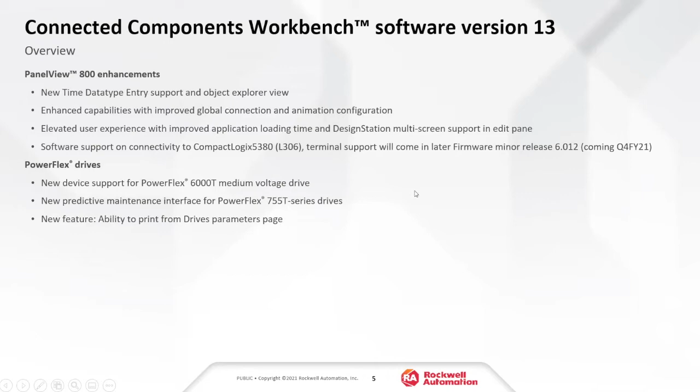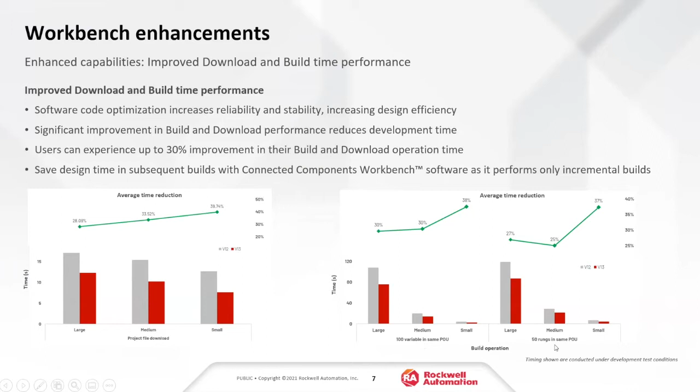What you're looking at here in red is the build time and download time in V13 as compared to version 12. On a large, medium, or small application, roughly about 30 to 40% improvement. Same thing here on the build when you're looking at variables and on the 50 rungs.

On run mode change, there's been some enhancements made on the workflow. This is available on developer edition, the paid version of CCW that allows for run mode change. Some of you may know this in the Logix world as online edits. In the original mode, you would select run mode change, go over to your ladder, make your changes, and then you would have to test the edits to see if the running code is okay, and then go ahead and accept it, or decline it.

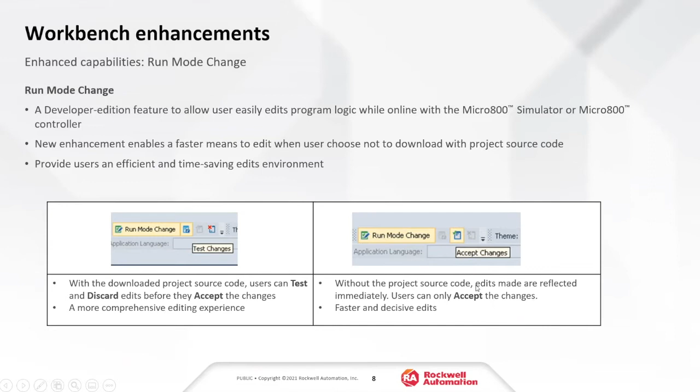On this newer workflow, you select run mode change, make your changes, and then you just accept the changes. There's no testing, there's no declining. It's make the change and then let it go. So that's a little bit of a faster workflow. I'll show you how to activate that feature.

On the tag browser, a lot of improvements have been made - much cleaner, with the ability to browse down into bit level addressing, the ability to change the scope of tags that you're looking at, to filter out and do search. So it's a lot easier to do.

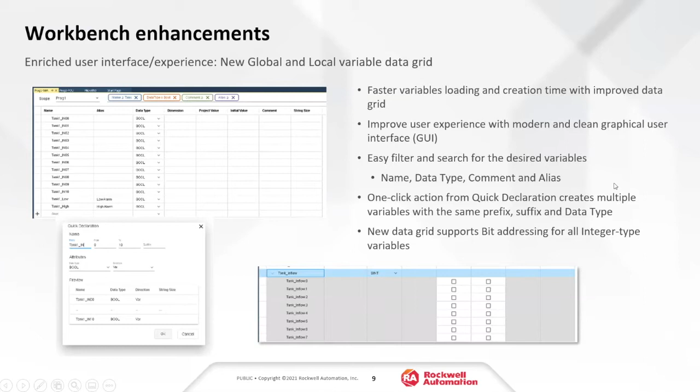The biggest new feature is the one-click quick declaration. This allows you to create multiple variables where you can add a prefix, a suffix, and then specify a data type. So really a lot of improvements made here.

On the Studio 5000 Logix theme, what happens now is the icons are changed over to what looks like Studio 5000. Anything else in the application, if there's a PowerFlex drive or a PanelView 800 graphic terminal, that gets dropped - it's still saved in the file, but for somebody more accustomed to using Studio 5000, since it's very controller centric, this is much more familiar to them. You can create your tasks, your interrupts, your routines, in a very similar fashion as Studio 5000.

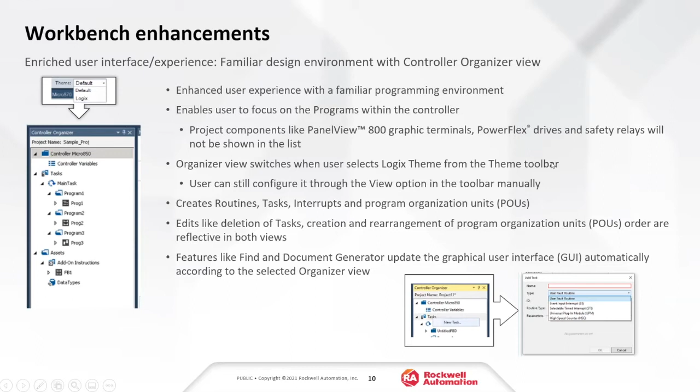The ability to see this is going to be more of a future feature as time goes on. Rather than finding out before or after it's too late that a product is end of life, Rockwell has built into CCW the ability to see the status of a controller.

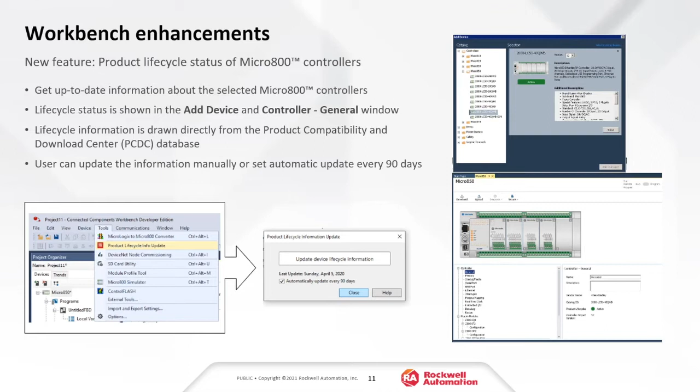This updates every 90 days, or you can access it from the tools menu and manually update that product life cycle. There are no plans to discontinue any controllers here in the near future, but several years down the road we may run into this, so it gives you more visibility into the status of that product. Then the last part is the find feature and the document generator.

Find can give you hyperlinks directly to your program once you do a search. The document generator lets you export the program into a Word document so that you can easily document all your tags, your programming, and put it into a nice Word document that can be printed out.

So I'm going to flip over to CCW and show what this looks like. Here we have the product lifecycle shown if it's active.

When I was talking about the first part, about run mode change and these multiple buttons up here to activate the faster online edits, there's an option in the main controller called download source code, and you need to select no. When you hover over this informational bar, it'll tell you that if you enable download source code, which is the default, the run mode change will give you the option to test those changes and then accept them. Setting this to no will just allow you to accept the changes, so much faster edit time.

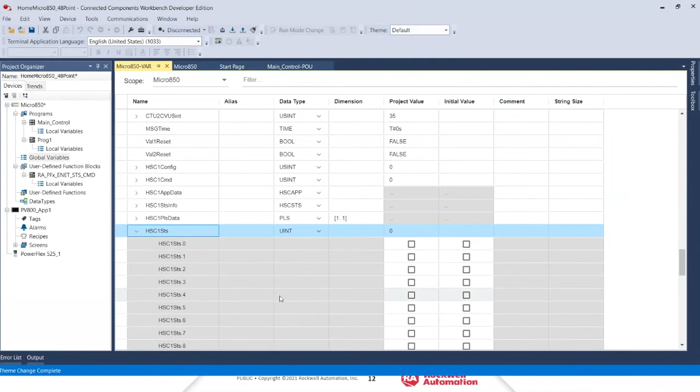Another new feature I talked about is quick declaration. So if I'm in the tag browser and I want to create, let's say, 10 timers really quick, it's going to add a prefix. It's got some dummy proofing here. So it's 0 to 9. Let's say I accidentally make this 20 - well, then it's going to increase this number because you can't go before it, and we'll make that 29. We can add a prefix or a suffix here to say timer.

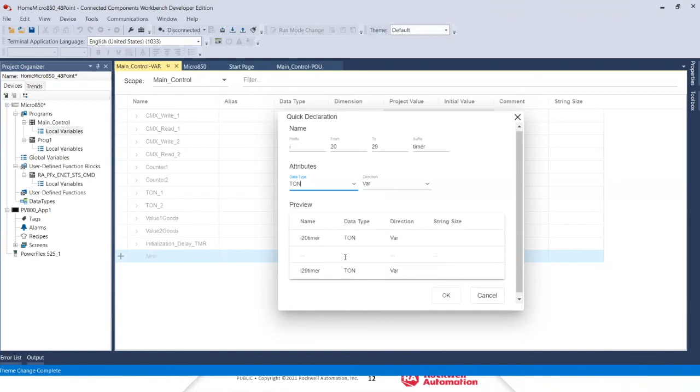We can set our data type. We'll do a timer on delay. And here it gives you a preview of what this looks like. You hit OK, and now we've created our 10 timers here pretty quickly.

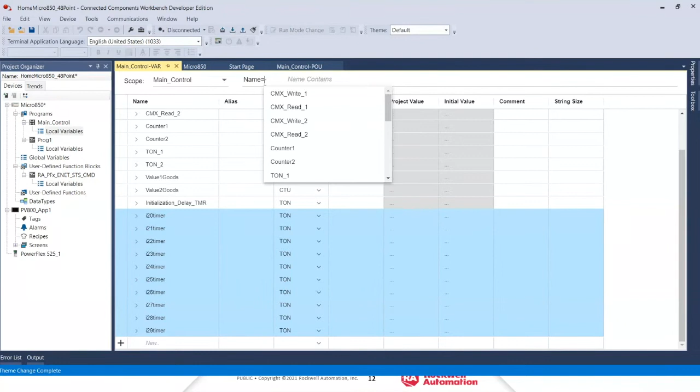Then on the filtering, let's say we want to find our timer value and we want to look for a data type of TON. Here we can add up to 4 filters. So here there's comment, and after that is alias. You can go ahead and quickly filter out your tags.

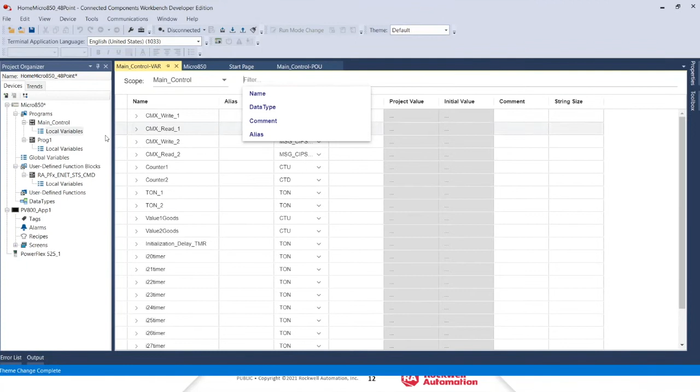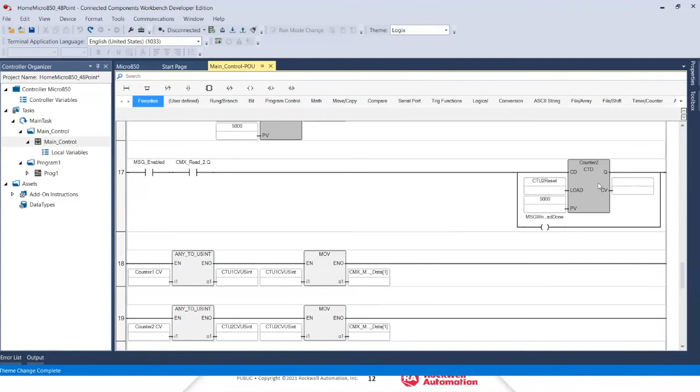On the Logix theme, you'll notice on this left-hand side there's a panel view, there's a PowerFlex, and you'll see the icons here look like Micro 800. When I flip this over to Logix, it changes, and this will look more like a Studio 5000 file. The instructions themselves are pretty much the same, but it makes it more familiar up here at the top, where you have your different symbols.

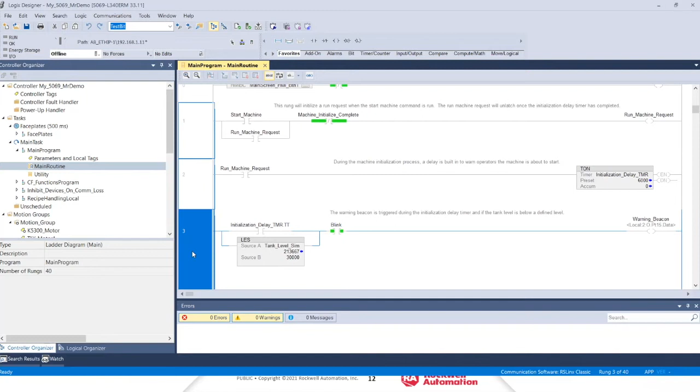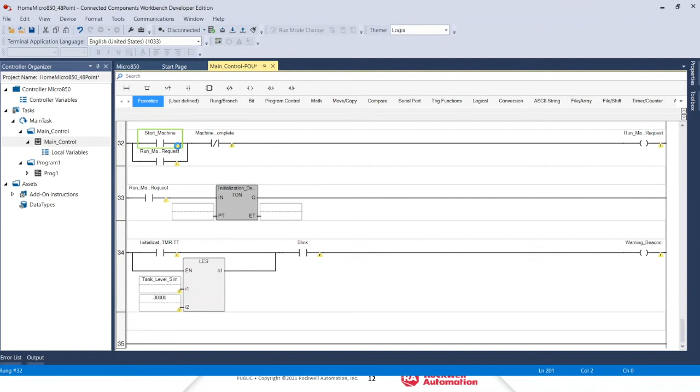The other thing I want to show is, if you aren't aware of this, you can go into Studio 5000, and here I'm going to highlight these 3 rungs. I'm going to copy, and I'm going to head over to my CCW. I'm going to add a rung here just to make it easier to right click and paste. I can now paste, and it'll create the tags that were out of Studio 5000, and then we can go ahead and double click here to create each of our tags.

So it'll go through, and then you can just hit OK. It'll create those tags, convert the timer to the Micro 800 version of timer, and bring in the less than equal to.

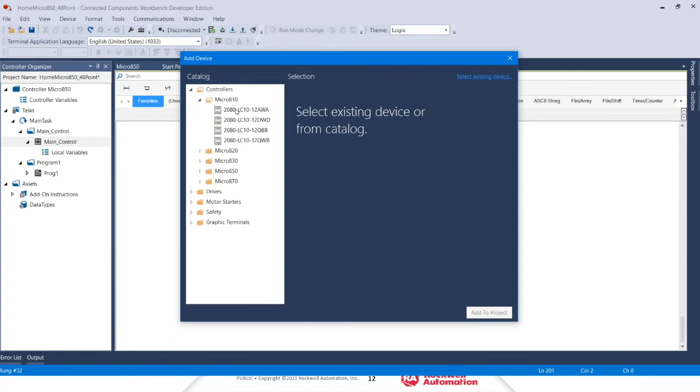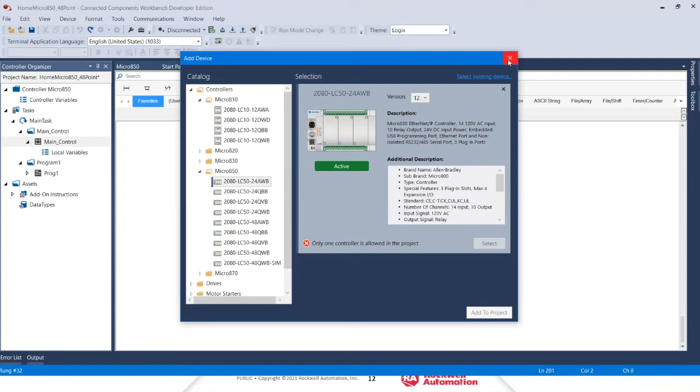When you're creating a new controller file and we hit new, when I select a controller it's going to tell you if it's an active product - as I said, right now everything is active. You'll notice that your firmware version remains at version 12, despite this being 13, so there's really no new firmware update. This is backwards compatible with all the other Micro 800 controllers, so you don't have to worry about firmware differences - you could just go ahead and upgrade your program, and away you go.

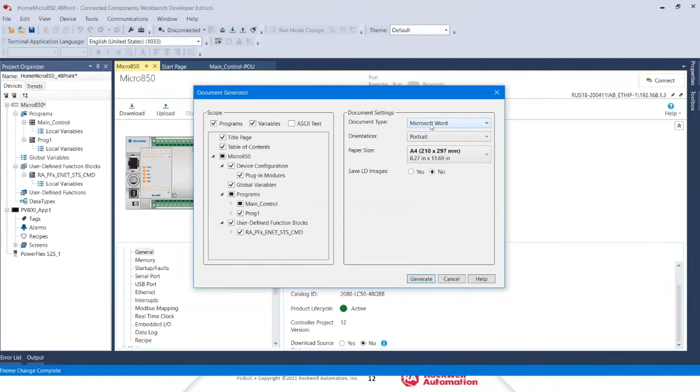Okay, we'll look at the document generator, available under File. You'll have the controller selected, then you can go ahead and select what you'd like to export, and what document type to generate, which can then be viewed later in a Word document.

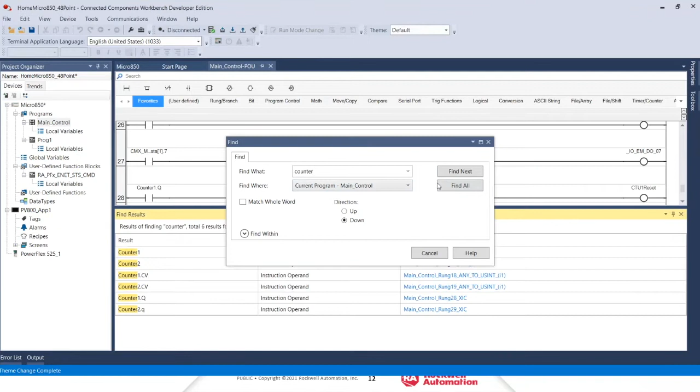The Find feature—if I'm in Programs, you can do a Control F to bring up Find, under Edit, Find. Let's say I want to look up my counters and do a Find All. This brings up all of my different counters, giving me a hyperlink to look for it that'll take me right to it. So there's been a lot of improvements made on Find.

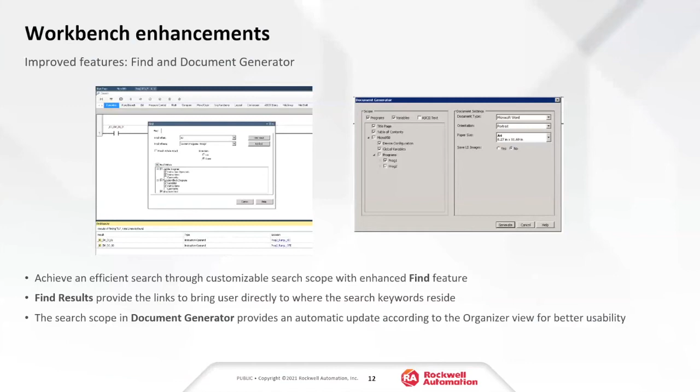That pretty much covers everything that's new on the Micro 800 side. What I'm going to do now is go back to what's new now with PanelView 800.

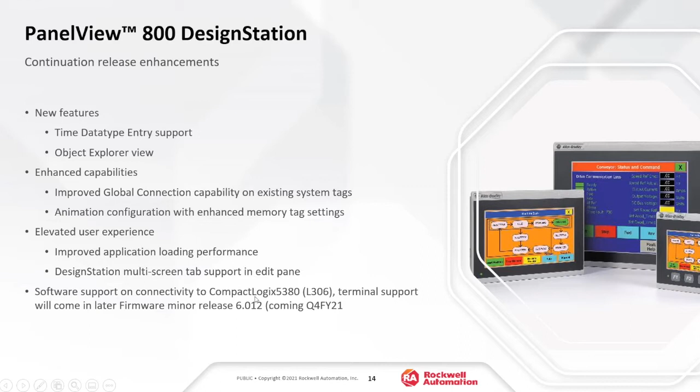The biggest enhancement has been the time data type entry. There's also the Object Explorer view, which I'll show you in a little bit. They've added more global tag connection to the existing system tags, animations now with different memory tag settings, the ability to edit multiple screens, and software support for the L3065069.

There's a question in the chat: did timers and counters get bit level addressing, like EN, TT? Well, TT still does not exist in the Micro 800.

A TT would be a timer timing bit, so that hasn't been added. The timer still gives you the elapsed time and the preset time. What I can do at the end of this is show Scott a drill down into that, just to stay within our 30-minute time limit. I'll go ahead and address that at the end, okay?

On the time data type entry, we're using a string entry, and we can manually type out the format for timer, T pound, and what time value we'd like to add. Or if you're more accustomed to milliseconds, you can just type in 10,000 and it'll automatically convert it to 10 seconds.

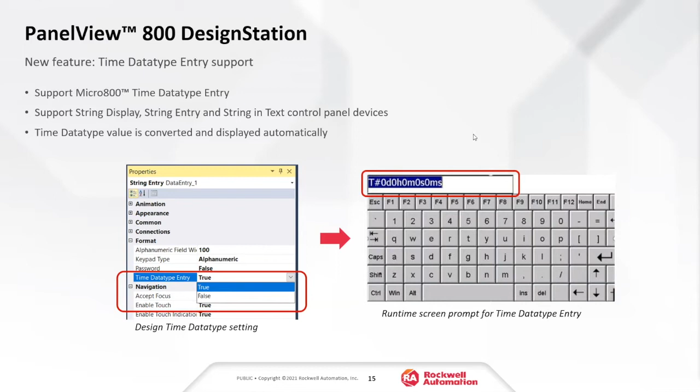The Object Explorer view—bringing out Object Explorer will give you all of the objects on the screen. You can choose to lock down an object for edit, so it'll hold its position and you can't make any changes to it. You can do a vibrate, so if you don't know what object it is that you're looking at when you select it in the Object Explorer view, clicking vibrate will cause the image to dance a little, just to call it out to you.

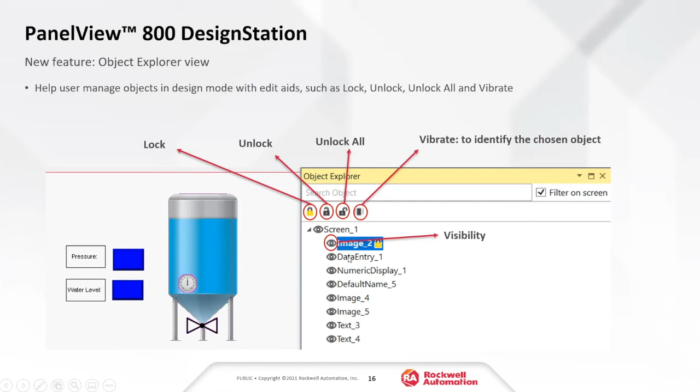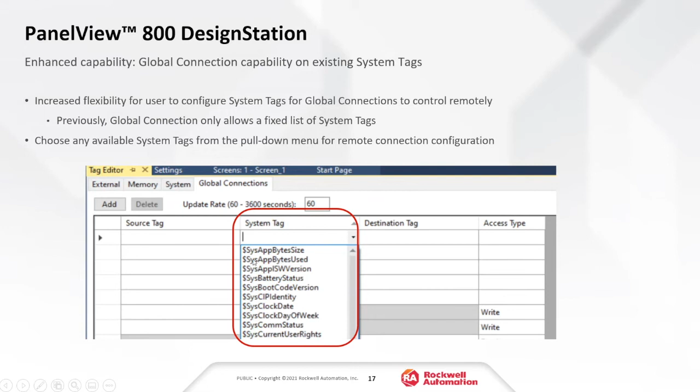On the global tags, they've added the ability to access the global tags, so you can choose a lot of the system tags now for global connections. There's also enhanced memory tag support.

Now there's an advanced setting where you can create a memory tag that will have an auto change feature. You can set the rate that you want that auto change to increment, and set the trigger if you want it to always trigger, or if you wanted to look at a trigger tag. This can be useful for animations.

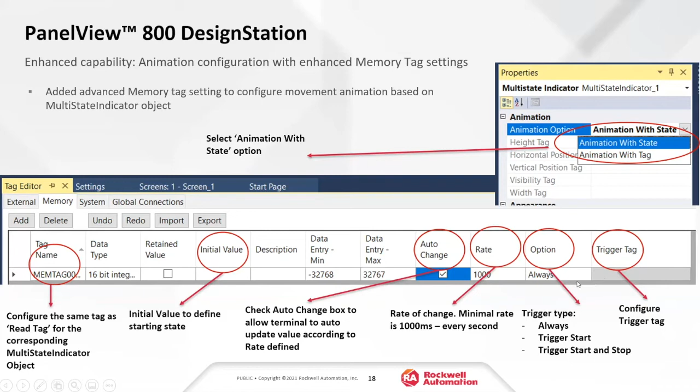Now what we'll do is flip back over to CCW, and here when I go to my Panel View 800 app, on this string entry, let me talk about properties here. When I select this button, this is a string entry. I have set the data type for time data type entry to true, so this needs to be turned on for that timer value to be converted.

I'm also writing to my average timer tag, and I'm giving it the indicator so I can display what that timer's been set to. This is a string display, and I also have the average timer elapsed time—so I'm looking at the elapsed time, and I've set this to the time data type.

Now I'm going to remote connect to my Panel View, and you'll have to excuse the discoloration. Right now I have my timer set to 1 second. You'll see it counting up, which kind of clues you in on what this data type looks like and how you can edit the timer. So I can select, maybe I want to make it 5 seconds—I can type in 5,000, and it'll update to 5,000.

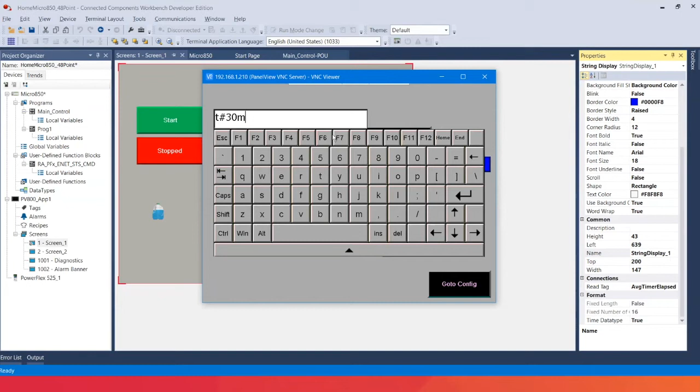This will count up. But if I know I want a longer timer value, maybe 30 minutes, I could do T pound 30M, for 30 minutes, and it will set the millisecond value to what is 30 minutes, and then this will continue counting up. There's no data manipulation needed within your Micro 800 file anymore.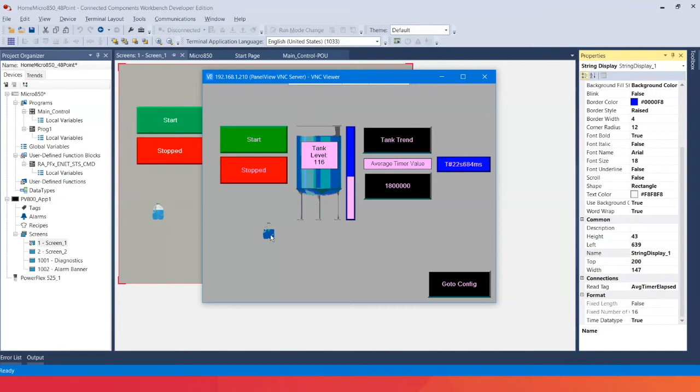This is just done all within the firmware of the panel view. Here you'll see this little milk jug running across the screen, and every second it advances 1 pixel. We can look at how that's been accomplished when we go back into our Object Explorer.

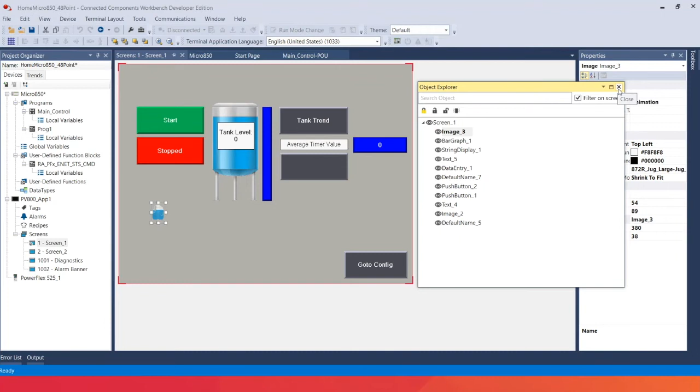Under View, you can pull out the Object Explorer. Here I have all of these on the screen, so I can select, and you'll see it starts to highlight. If I can't see it, I can select vibrate and it'll dance around for a second. So I can select image 3 and lock that down so that I can't make any changes to it. I can click on it all day long and it doesn't do anything. I can go ahead and unlock all if I need to edit it.

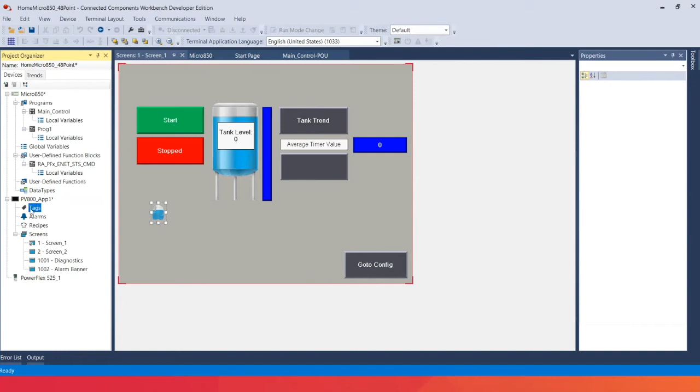Here you'll see my horizontal position has been set to this tag called animation. When I go into my tags, here I have memory, and I've created this tag called animation. From here, I can select advance and open up.

I can create a min and max, which I've done 50 pixels and 300 pixels. I've enabled auto change, and then the rate I can set has different time increments that are pre-programmed. Then you can set when you want this to trigger. I just have this always running.

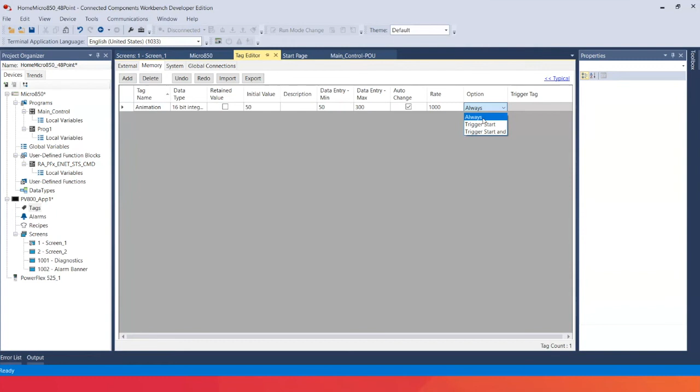Looking at global connections, here we have additional source tags that we can use. A lot of these system tags have been added now that you can use within global connections. So you can get access to the IP address, or if you need access to the contrast, OS, there's a lot more information that you can bring into the Panel View 800. So that pretty much covers what's new within the Micro 800 and Panel View 800.

And what I'll do is hand it over to Lee, and he'll go over what's new on the PowerFlex Drive updates.

All right, thanks, Rob. All right, so like Rob said, I'm Lee Waldrop. I'll be doing the PowerFlex portion of this.

So there's been several updates for the drive profiles since the release of CCW version 12. If you haven't been downloading those profiles, that's okay. As soon as you download CCW version 13, you'll have the latest drive profiles available, giving you access to Rockwell's current features for all of their drives supported by CCW. Next slide.

All right, so the 6000T, CCW version 13 now supports the medium voltage 6000T, including a startup wizard. Rockwell has used the same architecture and firmware found in the PowerFlex 755T and all of its different variations within the 6000T. This gives a similar experience with both drives, and it streamlines your programming and any training you might need to do. Basically, if you've done any work or training on programming the 755T in the CCW environment, you'll see a very similar experience with the 6000T. Next.

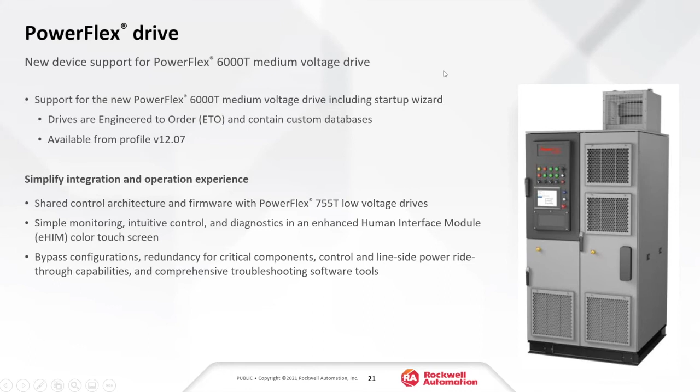All right, the predictive maintenance with TotalFORCE technology. The predictive maintenance feature in CCW for the T-Series drives like the 755T and the 6000T is designed to help mitigate downtime. The screenshots you'll see there, I can't go live with that. I can't fit a 755T or a 6000T in my house, and you have to be connected to one to get that screen on CCW. But the drive uses formulas that have been tested by Rockwell to calculate remaining life of the components within the drive. Components like the LCL filters, caps, fans are some of the components.

You can even set environmental settings, so that'll be factored into the calculations for remaining life of the components. On top of this, you can set alarms to let you know when a component is getting close to its suggested replacement time. The graphical interface through CCW will also display the catalog number you'll need to order to replace those components. So all this is done to turn unplanned downtime, which no one likes, into planned downtime and to increase your machine's efficiency. Next.

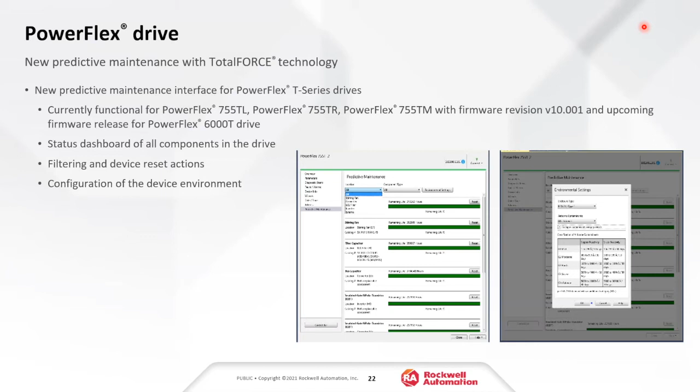All right, and back by popular demand, the export parameters function that fell off for a few versions of CCW is back with this newly reinstated feature. You can filter the parameters for all non-defaults and print them, save them to a PDF or in an Excel file. You can print the entire list of parameters if you want, or save them all to Excel. If you print them all for, say, a 755, there's just under 1,500 parameters - about 32 pages. So you might want to just stick with the non-defaults. But it's a great feature.

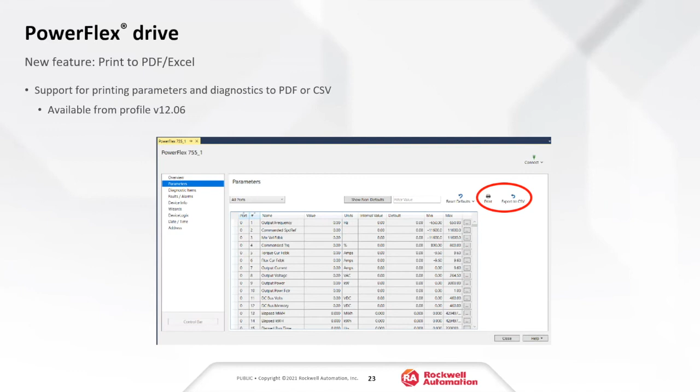It helps you back up your programs and might help you troubleshoot, give you a starting point, or in the chance that it fails to replace it, it'll increase your uptime by decreasing your downtime. So that's all I got, Rob.

Thanks, Lee. All right, I wanted to close this out, show you a couple of resources that are available. The first one from Rockwell Automation is what is called OnCourse, and this can be set up by your distributor. There are actually virtual applications hosted up in Milwaukee at Rockwell Automation, hosting all kinds of different applications.

And we can use this as a tool for training, or if you need help with just getting more experience on different applications. So here on OnCourse, there are 3 different applications available, and it gives you the ability to look at the programming, what was done to make this all work together. How do you talk to a drive? How do you talk to a servo? What does the PanelView 800 look like? So really it's a nice way to learn remotely on your own time, and give you some ideas on how to do some of these simpler applications.

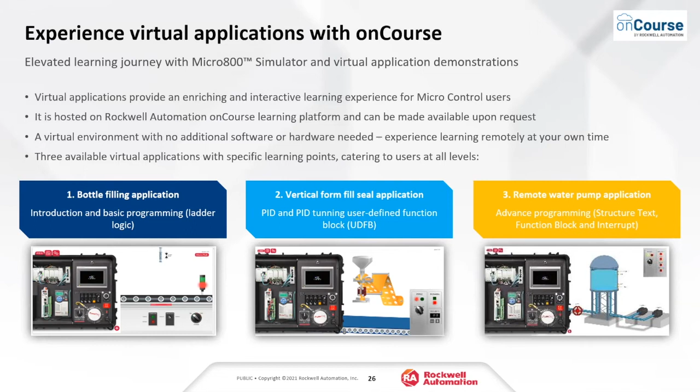And then aside from that, at any time, on rockwellautomation.com, you can access the literature library. There's a great YouTube channel now on CCW, all kinds of tutorials available if you'd like to do more drive integration, or do some basic motion profiles with our newer Kinetix 5100 servo system.

So there's really a lot of things that you can do with Micro 800. It's really designed to be a standalone system. You're not doing distributed I/O, and you just need simple, low-cost control. This is a great control system platform that really added a lot of new features to it to give it a lot more capabilities than, say, 5 or 6 years ago.

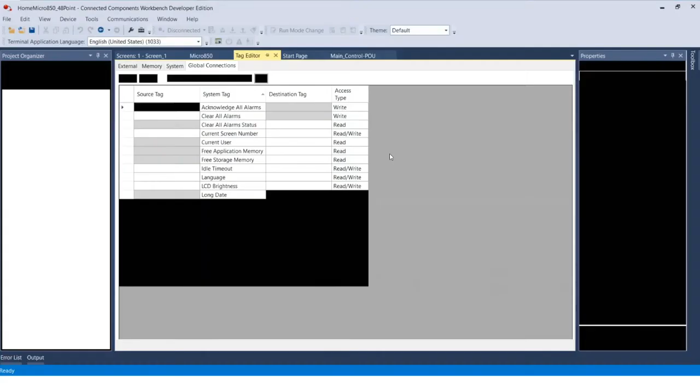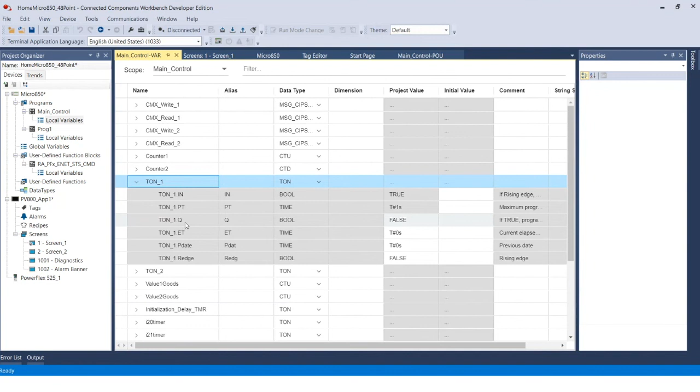So where am I using timers? I have some counters, but I'm looking at my time value and I expand this. You'll see you have a done bit, and then you also have this in bit. And so what I see people using, like to mimic the timer timing in your logic, it would look something like this. You'll have to excuse me because I'm kind of doing this on the fly. Because I'm within this scope and the timer is being used, I can do, I think I called it, yeah, TON1. And if I go to the end and put dot, I thought it was in, but I don't see in, so it might be the rising edge.

And then same thing, TON1 dot. And so what this is looking at is I'm on the timer, it's enabled, but it's not done. This pretty much mimics your timer timing bit. So a little different, but that's how you can make that same feature, and use this digital output. And so let's download.

Can you hear me, Rob? Yes. Okay, sorry, I had my laptop closed.

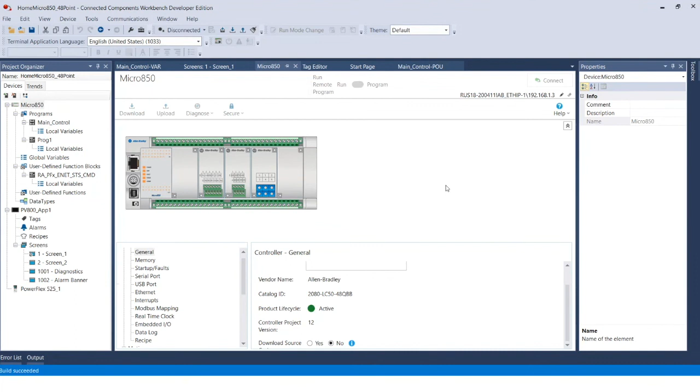What was the second Q that I saw in the pull down? Yeah, they have it in parentheses, and I'm not really sure why they have it twice.

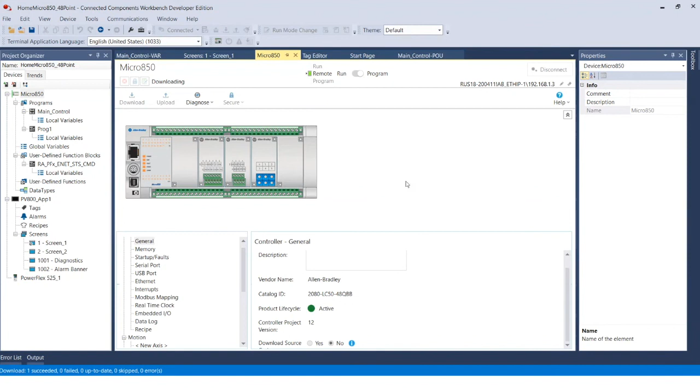Let's see here really quick. I wrote my program probably over a year ago and haven't thought of it since, unless I do a quick download once in a while. So I've got to refresh my memory on how I even did any of this stuff.

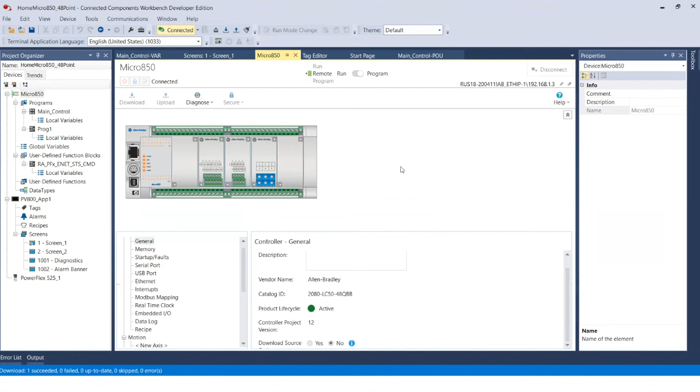But I remember I did have an issue with not all the bits that the MicroLogix had. Oh, I just did a bad thing. I did a destructive bit, so this might not work the way it should.

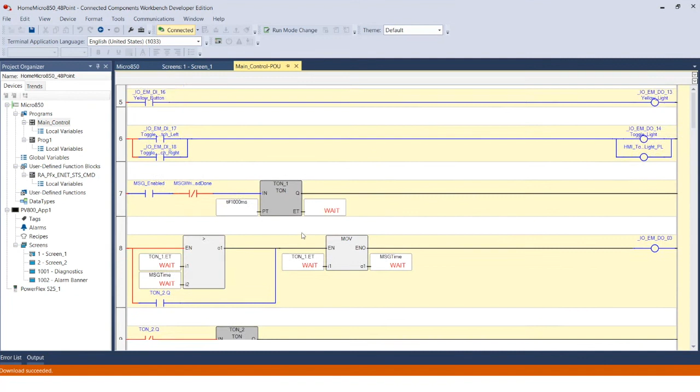Let's see what triggers my timer up here. So if message enabled, and the problem is I have a green light here tied to when my message... So this application is just messaging other CompactLogix, and so I need this.

So I'll show you here. We'll access run mode change. Use a different output.

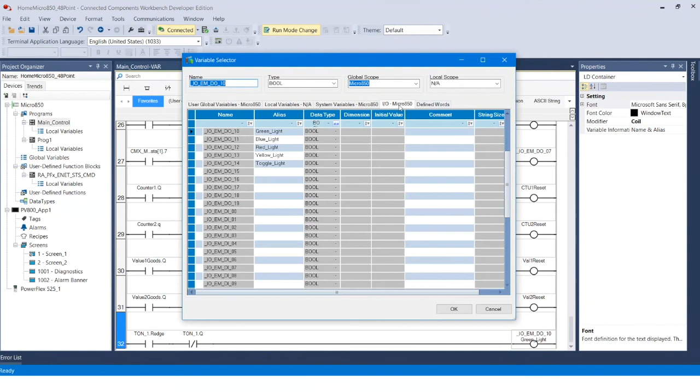And now, since I have that download source code on, no, I just hit accept. Then it'll go ahead and push those changes into the controller. So now you don't have to do a test and then accept.

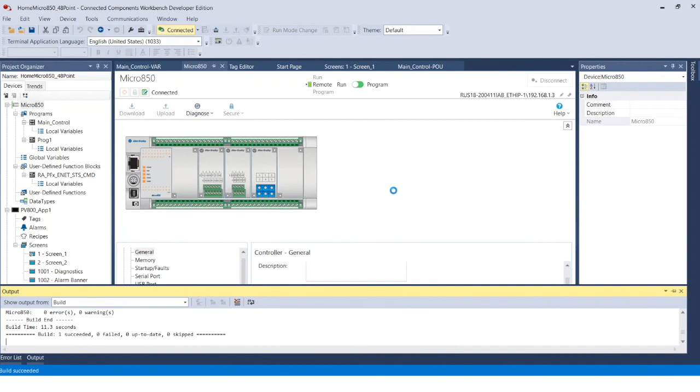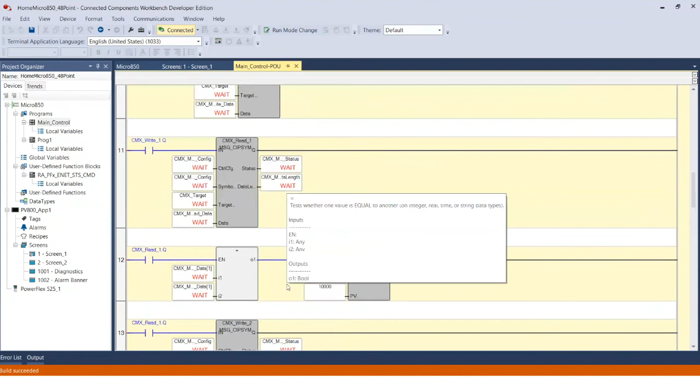All right, so if I go, I know it's not going to be super easy to see the timer going. Let's see, it's only set for 1 second. What I can do is push my start button here.

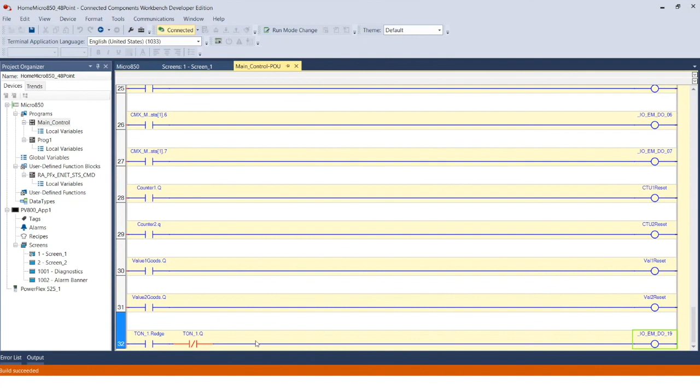Yeah, that didn't capture it quickly, but what happened was my output 19 kicked on for a second and then turned off. But that's how you can kind of get that.

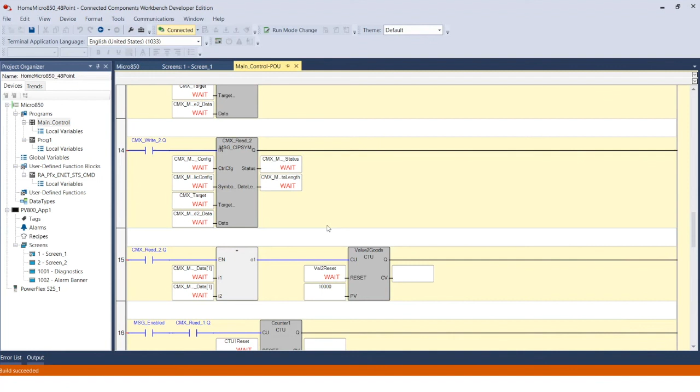So these, if you're within the same scope of this program, you can get your tags that way. And then if not, you'd have to create a global tag. So it's actually not even possible to do that.

It's not possible to access that because you can't, like, let's say if I were to create another ladder logic, I wouldn't be able. So just be aware of that. But that's how you can mimic that timer.

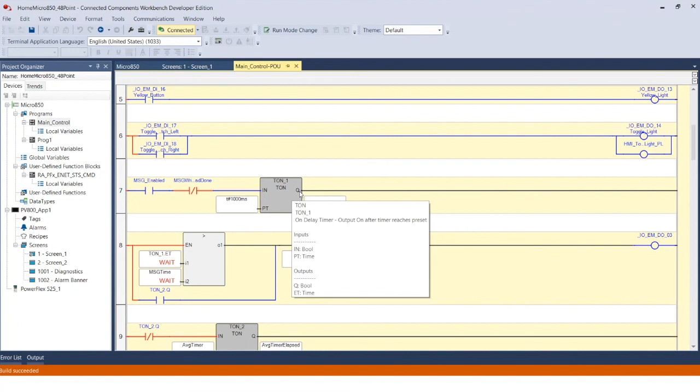Now you were asking about disconnect.

It's interesting, this is taking longer today. That's always the risk with live demos, right? Because earlier today, this wasn't doing this. Hey, you're welcome, Mark.

Any other questions, Scott? No, I think I'm good.

You can't address it if it's in, because the local/global thing threw me off, and the PanelView 800 doesn't address or pick up local tags, right? It's only global. Correct, that's still the case. Okay, that was another issue I remember running into.

So there is a way, if this doesn't cooperate with me, there is a way to actually set it up so that by default, global tags are what come up first. So when you go to create a tag, by default, it will put it in the global scope.

Well, that would be useful. Yeah, so it's under tools and options. I'm gonna go ahead and just see if this is not.

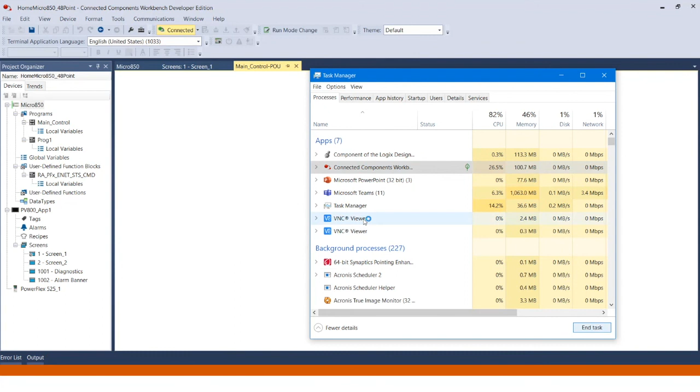Yeah, that threw me off because there were a lot of tags I had to copy and paste back over to global, because I kept forgetting that they were local, or I thought I could use them as local, and then I needed them in another rung or another ladder. Right.

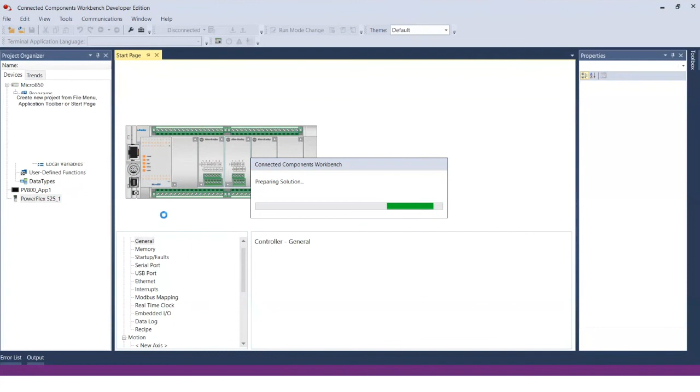Yeah, so when I go into, and I haven't done this yet, when you install a new version of CCW, it kind of takes away those custom features that you've set. So you'd have to go back into tools, options.

And I'm trying to remember, I think it's maybe it's the... no, oh here it is, preferences. Okay, so...

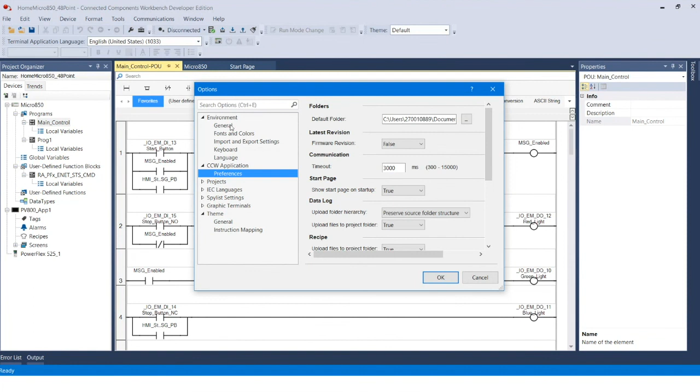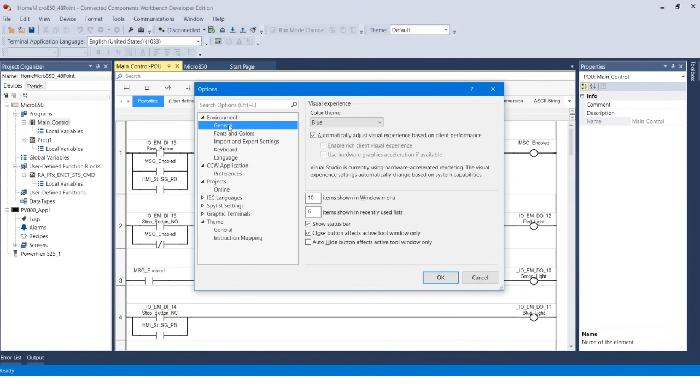And maybe I'm not doing this right, but I know there is a way to do it. Now I'm just shooting with dynamite here. Boy, if they took that away, that's awesome.

God, that might not be on there anymore. Well, I know to look for it now, but yeah, I don't use this every day.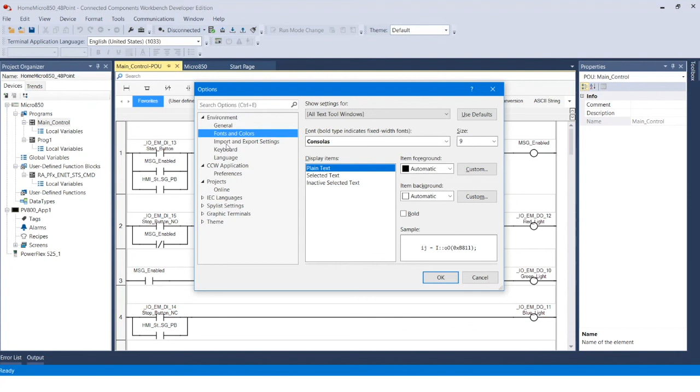So, yeah, I think if you're in, well that's interesting. That's not there. But yeah, there was a way to default over to global. I don't know if they moved it somewhere else, but I'll have to look and see. So, all right.